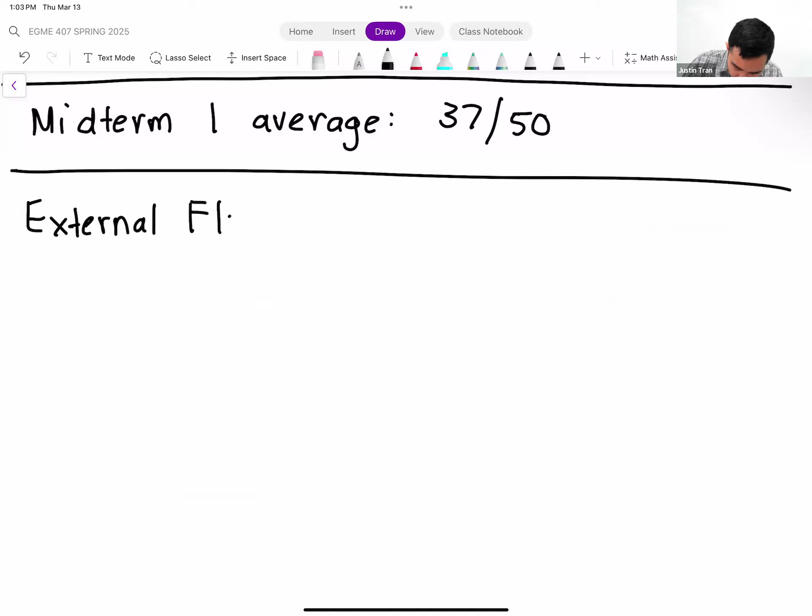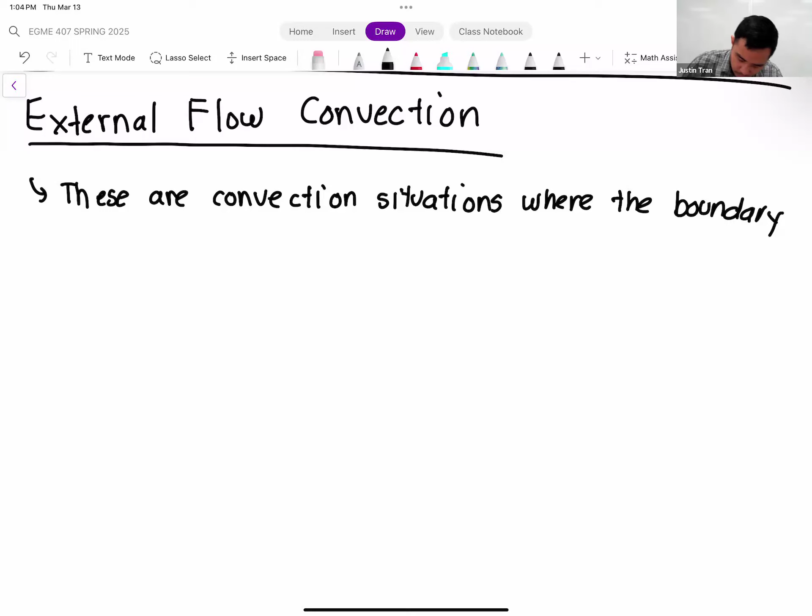External flow convection is a situation where we have convection heat transfer, meaning we have a fluid that's flowing through our system. But these are situations where the boundary layer is allowed to grow unimpeded. Whenever you have a fluid striking a solid or flowing past a solid, there's always going to be a boundary layer that forms. So for this case, we're looking at situations where the boundary layer keeps growing, with nothing stopping it from growing.

The classic example of this is flow over a flat plate. We have fluid flow coming towards the flat plate like this, and a boundary layer forms just like that. This fluid has a free stream velocity and a free stream temperature. In these situations, we're often interested in how much heat loss, or heat transfer, is coming from the plate leaving to the fluid.

So we're interested in the Q that's coming off of the surface, and of course we do have a way of computing this. The way we compute convection heat transfer traditionally is through Newton's law of cooling: H times A times the difference in temperature from the surface to the free stream.

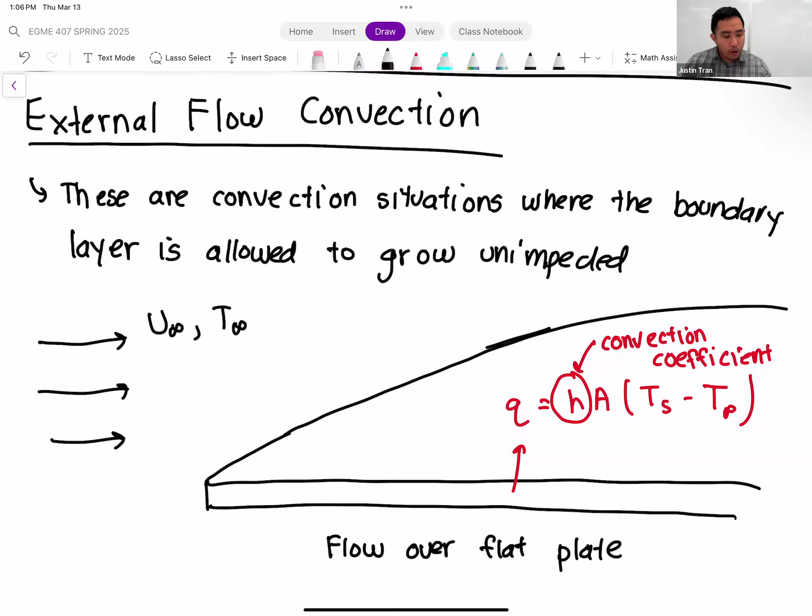We went over that methodology last time, and we did an example of that as well. But let me summarize it for you. Step one, we have to identify the flow geometry. Every single flow geometry is going to have a different correlation or formula that we use to solve for H. That's the first thing you have to do. Right now we only have one flow geometry, flow over a flat plate, but we're going to introduce more geometries as we go along.

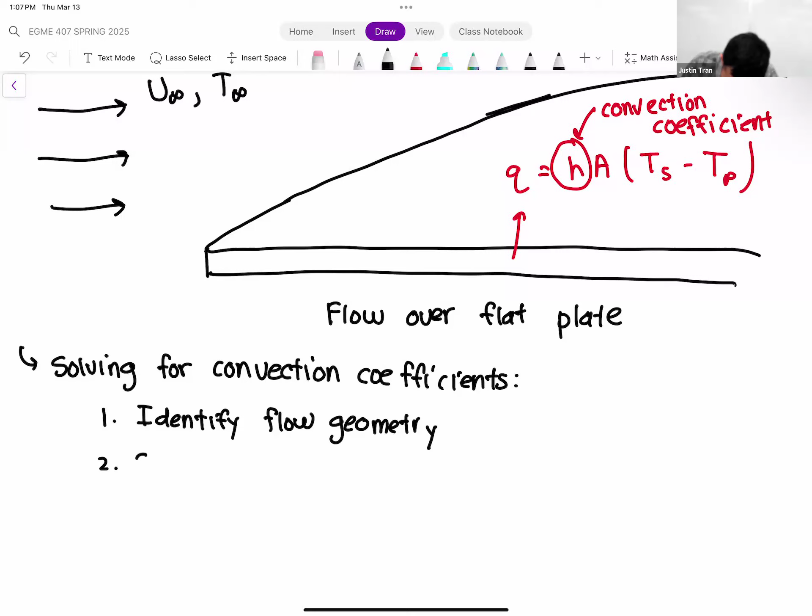Number two, we have to specify the film temperature for computing the fluid properties. A lot of the properties we use in our formulas are very temperature dependent. Things like the viscosity, the density, the Prandtl number all depend on the specific temperature of the fluid we are considering. So it's important for us to specify that film temperature so we can evaluate these fluid properties properly. The formula we typically use, the easiest one, is simply the average between the surface temperature and the free stream temperature. So TF is going to be TS, the surface temperature of the solid, plus T infinity, the free stream temperature, divided by 2.

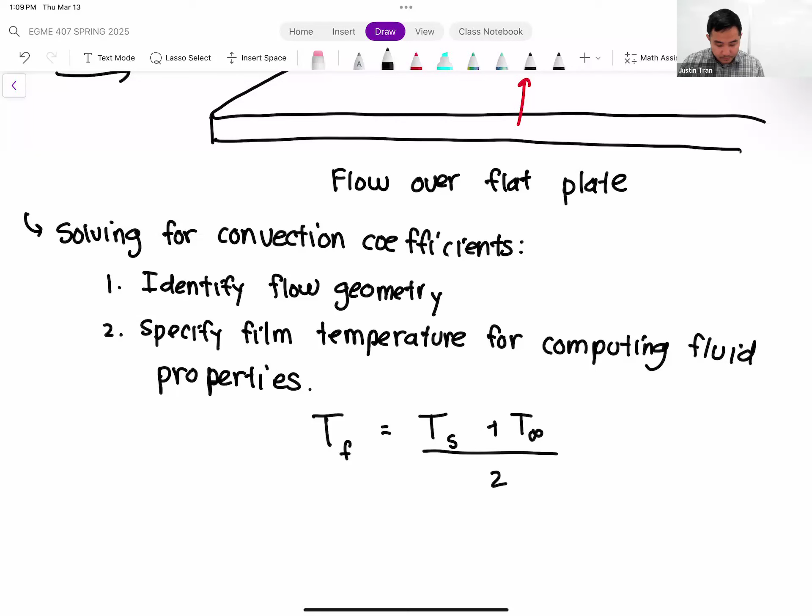Okay, and then based on that film temperature, you're going to look up the properties of the fluids in the corresponding tables or an online calculator in order to obtain their values.

Step 3. Once you have the fluid properties and you know the fluid velocity, you have everything you need to compute the Reynolds number.

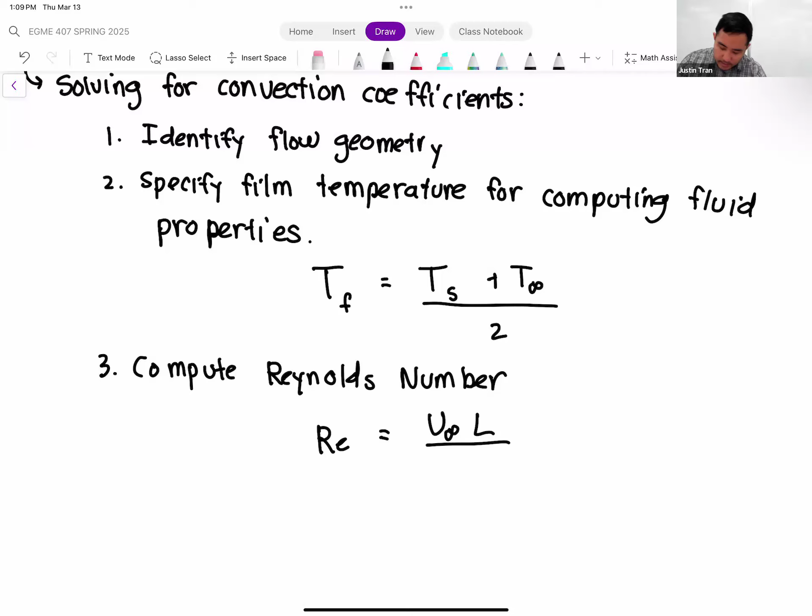So remember, the Reynolds number is equal to U infinity times some characteristic length. Usually that length is the length of the plate, at least for a flat plate, divided by the kinematic viscosity, which is what you looked up in step 2.

And then depending on the value of the Reynolds number, that's going to tell you whether your flow is going to be laminar or turbulent. For less than 5 times 10 to the 5th, this is laminar. But if we're greater than or equal to 5 times 10 to the 5th, we are turbulent. We haven't discussed turbulence just yet or how that's going to affect our Nusselt number correlations, but that's going to be the first thing that we do today.

Step 4 here is to select the appropriate Nusselt number correlation. This is kind of the key step because we're going to go over lots of different formulas for the Nusselt number. So you want to make sure you pick the right one.

Once you've selected the appropriate Nusselt correlation, step 5 is to finally compute the convection coefficient. We know no matter which Nusselt correlation you have, the Nusselt number is also equal to the convection coefficient multiplied by the length divided by the thermal conductivity of the fluid. So if you solve for H, it's just equal to the Nusselt number multiplied by KF divided by L.

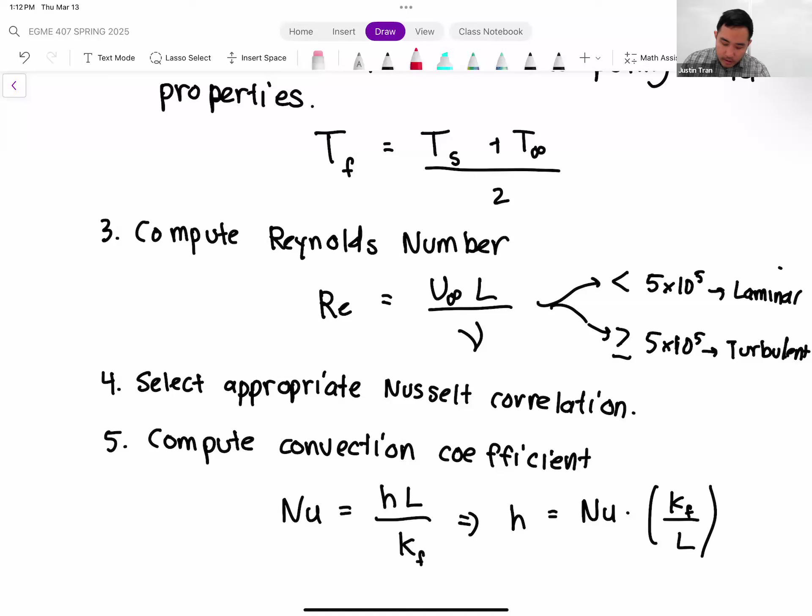So this kind of 5-step process, you're going to follow this, at least for the foreseeable future, for computing the convection coefficient. And of course, the key step here is going to be step 4.

I think part of the reason convection is confusing for people is that we're going to have so many different formulas that say NU is equal to something. So it's very easy to get confused between all the different formulas for the Nusselt number that we're going to go over. But you have to remember that each of these formulas has specific conditions on which you should actually use them.

So far, we've only gone over one, right? The only Nusselt number correlation we've gone over so far is 0.664 times the Reynolds number raised to the 1/2 power times Prandtl number to the 1/3 power. This is specifically only for cases when you have flow over a flat plate, and the flow is laminar.

So today, we're going to introduce a couple more Nusselt number correlations, just to be aware of the formulas themselves, of course that's what you plug into, but you want to be aware of the conditions under which you can actually use that correlation. I think that's kind of the main confusion with convection, that we're going to go over lots of these different Nusselt correlations. You want to make sure you pick the right one.

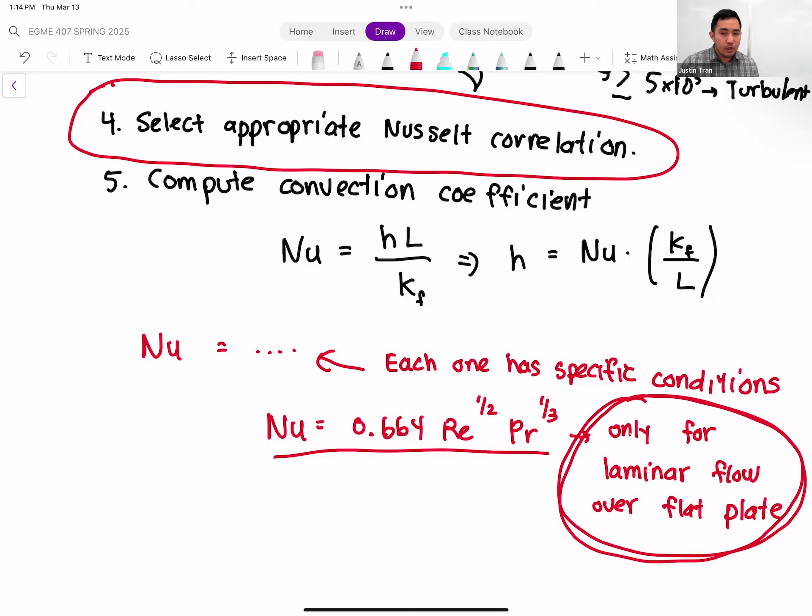So that was just kind of a summary of what we talked about on Tuesday. Any questions on this so far?

Okay, all right, so let's go over one of those other conditions. Let's look specifically, let's stay with the flat plate. So let's look at the flat plate under different conditions.

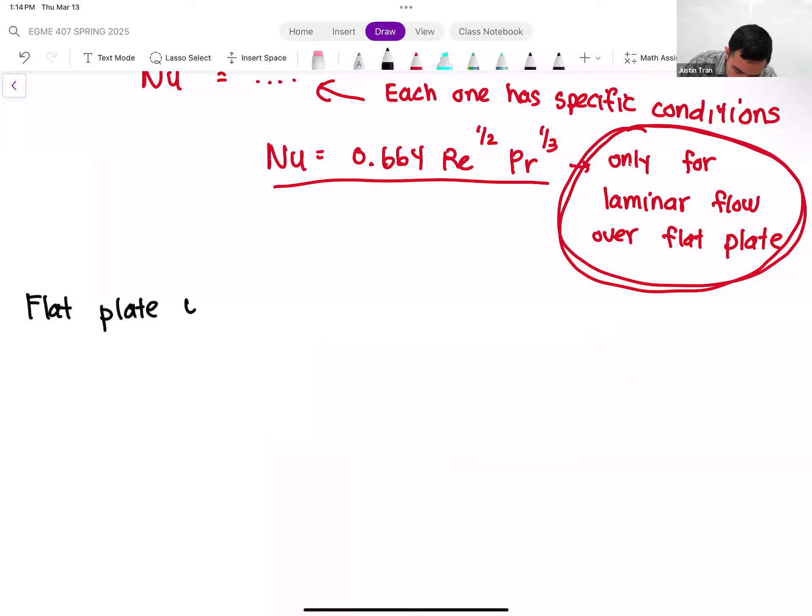If you change the flow conditions, even some of the thermal conditions too on the flat plate, it can affect how your Nusselt number is computed. So let's start with turbulent flow.

So if you remember from last week, remember we discussed how turbulent flow is often used, or the way that it affects heat transfer is that it often enhances heat transfer compared to laminar flow.

Right, and so that's going to be reflected in our Nusselt number correlation as well. So let's go ahead and state it: the Nusselt number correlation for turbulent flow over a flat plate. Our flow geometry is the same, it's just that our flow conditions are different.

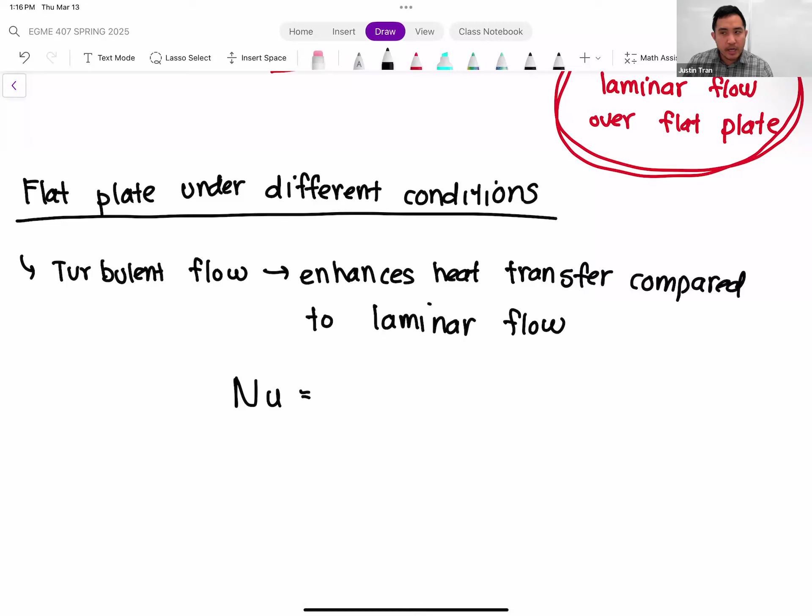The correlation is 0.037 times Reynolds number raised to the 4/5 power times Prandtl number raised to the 1/3 power. Actually, I should append this: this is for a fully turbulent flow over a flat plate. We'll go over what that means in a second.

So if you compare this formula for the Nusselt number correlation to our laminar case, which conveniently is right there, if you look at the coefficient in front, it may look like the second correlation is actually less. If you compare the 0.664 and the 0.037, just based on that, it looks like your Nusselt number for laminar flow is going to be 20 times higher than that for turbulent flow. But if you actually look at the exponents, the main difference between these correlations is that for turbulent flow the Reynolds number is raised to the 4/5 power, as opposed to laminar flow, where the Reynolds number is only raised to the 1/2 power.

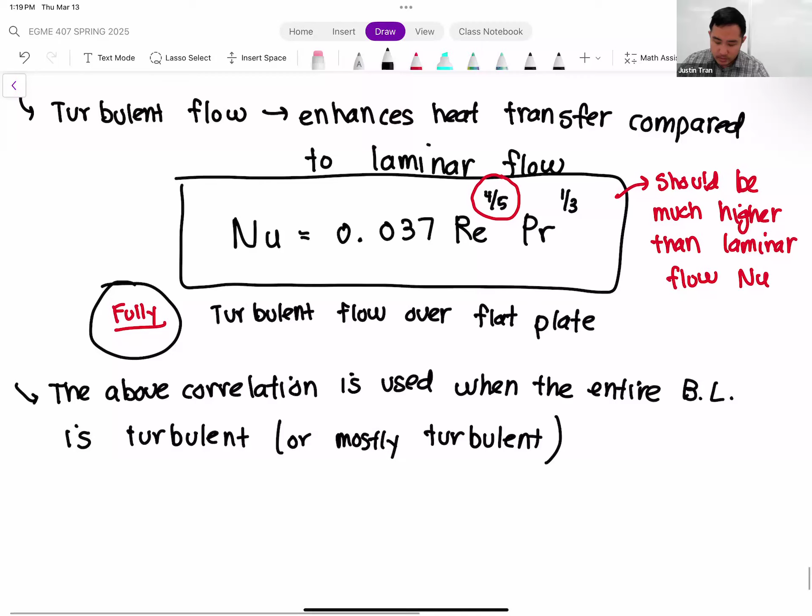For undisturbed flow, where you don't have anything there — we're going to talk later about how sometimes you may want to trip turbulence on purpose, adding a turbulence trip wire or a rough surface to induce turbulent flow. But if you have a perfectly smooth surface with undisturbed flow, the boundary layer actually starts out laminar and then transitions into turbulence.

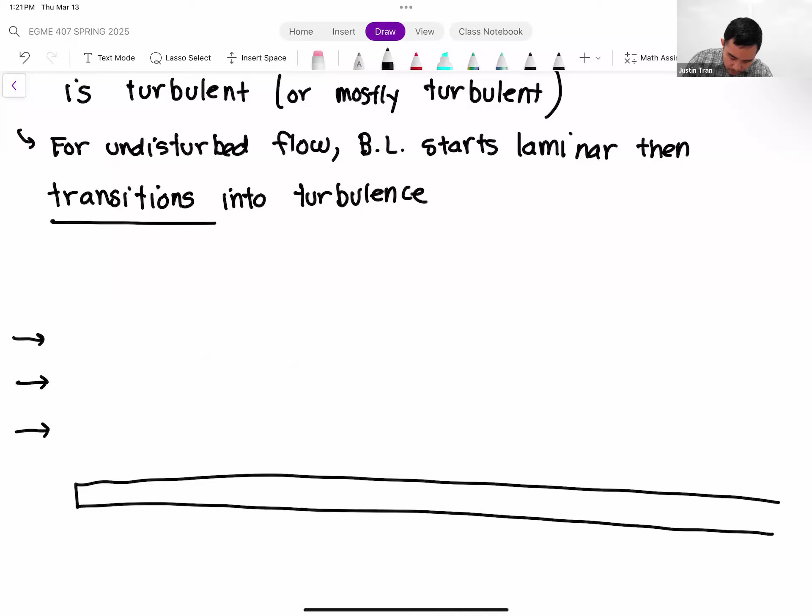It looks something like this: if we draw a flat plate, we have flow coming at the boundary layer like this, and we're going to assume this flow is undisturbed, so there's nothing impeding the flow or inducing turbulence. At first the boundary layer is going to be laminar, and this always happens unless you trip it. So the front region of the boundary layer is always going to be laminar, and then at some point the flow transitions into turbulence.

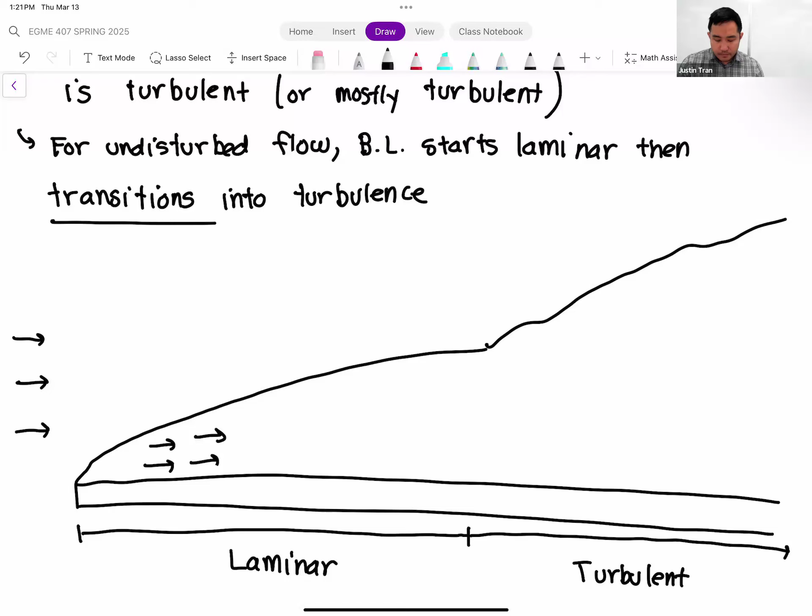Once we get to this point, the flow gets more chaotic. This type of boundary layer, where you have a laminar region and a turbulent region that are roughly about the same, we call a mixed boundary layer.

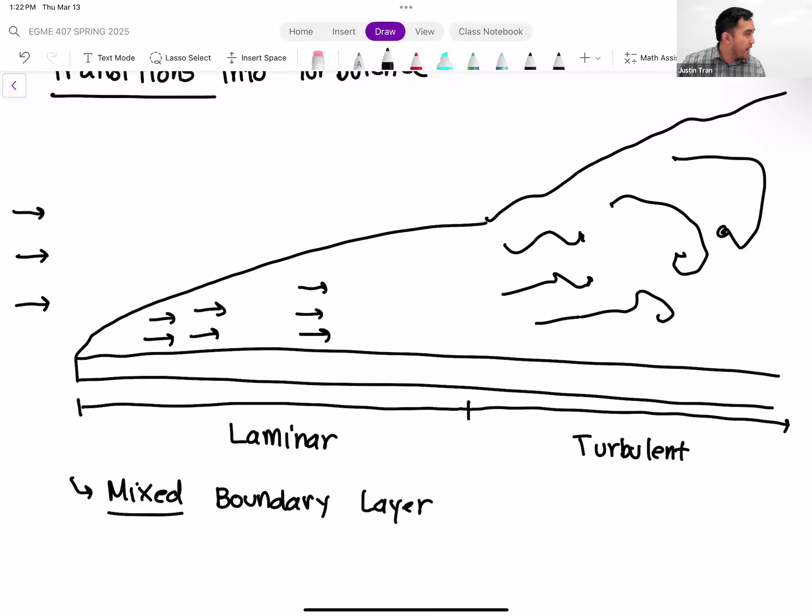A mixed boundary layer has another Nusselt number correlation. This correlation accounts for the fact that we have a laminar region and a turbulent region, and the heat transfer characteristics are going to be different in each. This correlation looks like the following — it's a little bit more involved.

It's going to be parentheses, 0.037 times Reynolds number to the 4/5 power — that's the contribution from the turbulent portion.

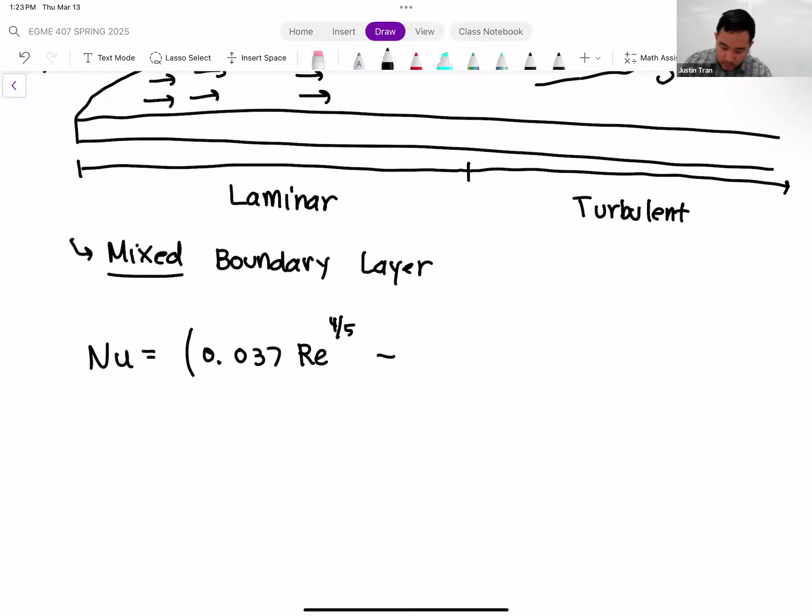But we have to adjust this — we have to subtract out the fact that this boundary layer starts out laminar. Luckily, or maybe unluckily, this number is a fixed number: 871.323, a very random number. Then you multiply this by Prandtl number to the 1/3.

So if you look at this formula compared to the fully turbulent boundary layer, you can see the only difference is that we're subtracting this term. All this term does is adjust based on the laminar region of that boundary layer.

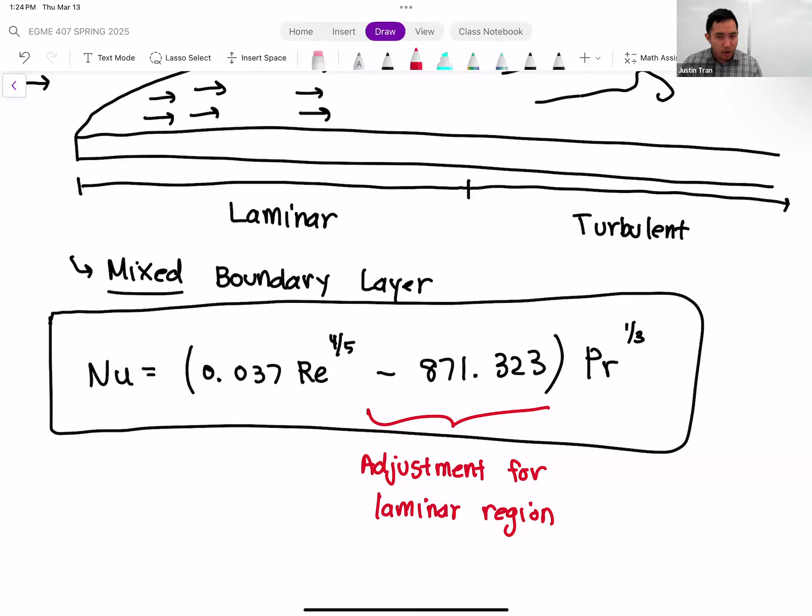Technically speaking, unless the problem tells you that you have a rough surface purposely tripping turbulence, this formula here is the more correct one to use. This number can be hard to remember—honestly, I always forget it, that's why I have it written down. A lot of times your boundary layer is 99% turbulent anyway, so it probably won't matter which one you use, but if you want to be technically correct, this one is more precise, especially in boundary layers that are transitional, close to that threshold.

Questions? When we have a fully turbulent flow, would that be told to us, or will we have to determine that with the Reynolds number?

Yeah, there are usually two different cases for this. There are cases where your Reynolds number may be exceptionally high, like something on the order of 10 to the 7th power. In that case, you can assume the boundary is fully turbulent because the Reynolds number is so high. There might be other cases where the problem tells you the geometry added a tripwire or some kind of rough surface to purposely trip turbulence—in that case, you can also assume you have a fully turbulent boundary layer.

So, since a flow can't just all of a sudden go from laminar to turbulent—say, for example, if we were to get a Reynolds number computed to be 5 times 10 to the 5th, can we assume that's a mixed boundary layer?

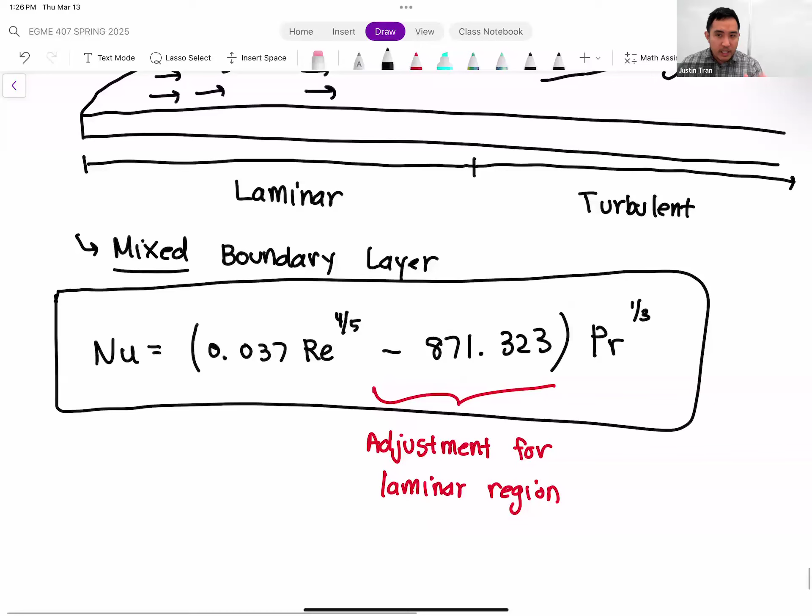Another interesting thing—I think the homework actually asked this too—is you can actually locate approximately where in the boundary layer the flow transitions to turbulence. This can be useful for determining exactly how much of your boundary layer is turbulent or not.

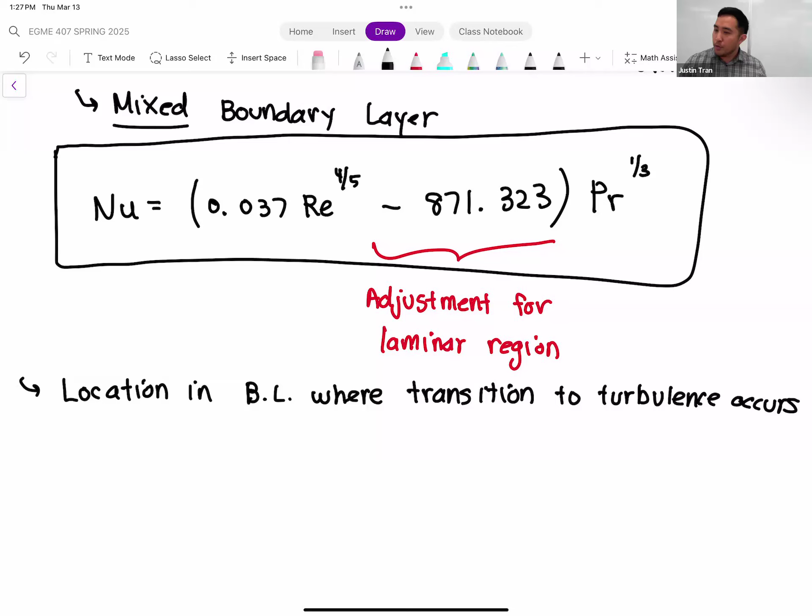We know that the flow transitions to turbulence when the Reynolds number reaches 5 times 10 to the 5th, right? That's kind of the magic number for external flow. So if you have flow over a flat plate, you can set this equal to the Reynolds number itself: U infinity divided by the viscosity.

But instead of plugging in the total length of your plate, you can instead solve for some location X. If you set the Reynolds number exactly equal to 5 times 10 to the 5th, you can compute the exact location X where that transition occurs.

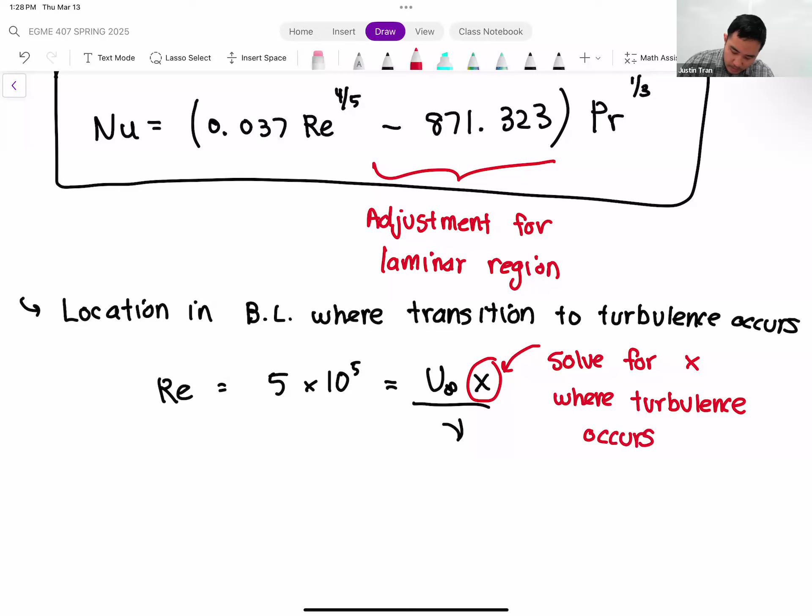So if we just rearrange this, we have X is equal to 5 times 10 to the 5th multiplied by viscosity, divided by U infinity. Sometimes we call this X sub C—that's the critical length where turbulence occurs.

Sometimes it's very obvious where your Reynolds number is extremely high, but if you're not sure how much of your boundary layer is turbulent, you can take the ratio of this critical X sub C divided by L. The C stands for critical.

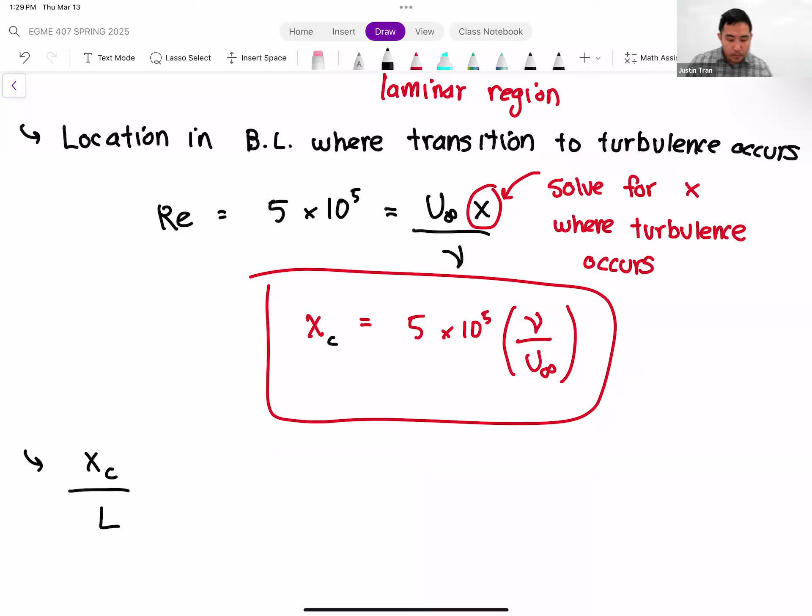So if you take the ratio between the critical length and the total length of your plate, this will show you the percentage of your surface that has a laminar boundary layer.

If this percentage is anywhere between 1 to 5%, I would just assume that the whole thing is turbulent. There's no actual number for that, but that's just kind of my own approximation. If you can always remember the number 871.323, then you can just use that formula there. But I have a hard time remembering this number, so a lot of times I just assume that the boundary layer is completely turbulent.

Any questions on this?

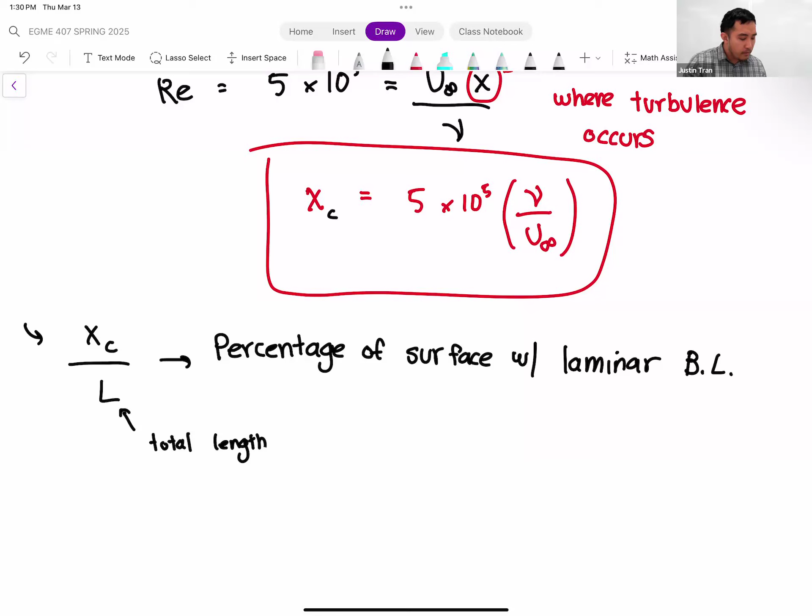Alright, so there's one more Nusselt correlation that I want to go over before we do our next example. This one is a little bit more niche, and honestly I don't use it all too much. But for cases where the thermal condition at the plate is different, that does actually change your Nusselt number correlation as well.

Because technically, the thermal condition at the plate is going to affect your thermal boundary layer production, and so that's going to affect things. So what do I mean by the thermal condition? So far, we've essentially assumed that the plate is at a uniform temperature, so the entire plate is the same temperature throughout. In other words, there's just one surface temperature on the plate, and that surface temperature goes throughout the entire plate. But there's a lot of situations where that's not true, right?

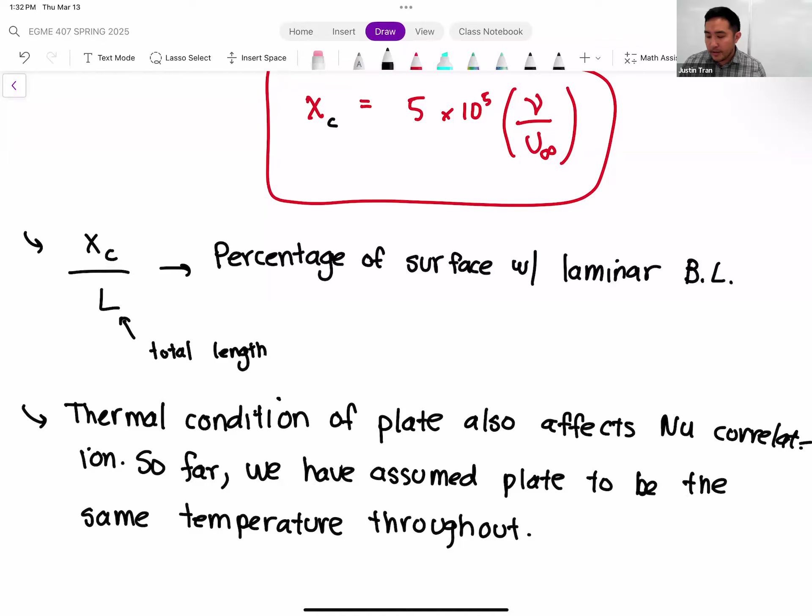If you think about our fins, one of the hallmarks of fins and extended surfaces is that you have a much higher temperature near the base of the fin and a much lower temperature at the end. So that assumption of the plate being all the same temperature is probably not going to be appropriate in that case. We can adjust our Nusselt number correlation for cases when our plate may not have a uniform temperature, but maybe has a uniform heat flux throughout the entire plate.

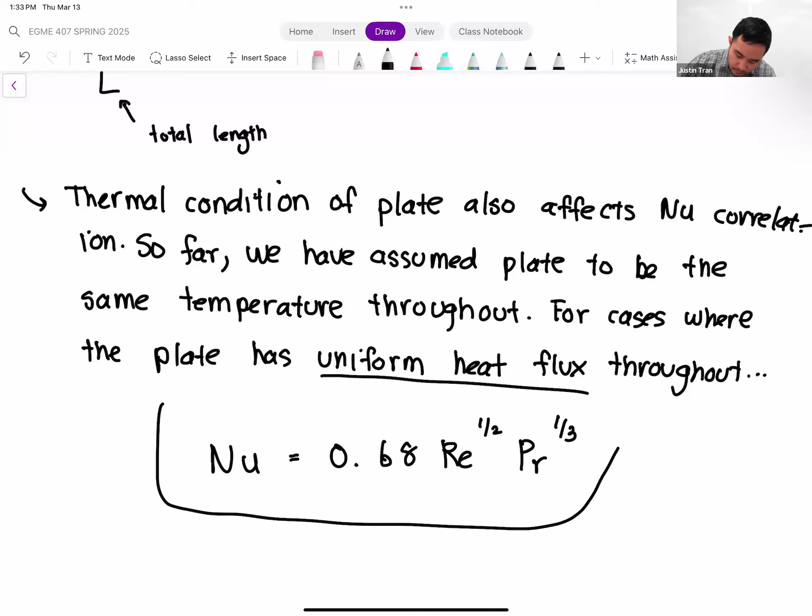This Nusselt correlation would be more appropriate for something like a fin, where we know the temperature is going to change throughout the length of the fin, but it's probably more appropriate to say that the heat flux is going to be more uniform throughout. Then our Nusselt number correlation is 0.68 times the Reynolds number to the 1/2 power times Prandtl number to the 1/3. This is specifically for laminar flow.

Question, yes. How do we know when it's like, besides just telling us it's more heat flux, is that the only thing that helps?

Yeah, so honestly, for most practical situations, it's going to be neither a uniform temperature or a uniform heat flux. It's going to be somewhere in between. It's very hard to get a physical situation to obey that exact thing, but usually it's going to be closer to one or the other. For most of my cases, I would lean more towards the side of uniform temperature, that's going to be the more common case. It's only really if you have a really long surface where you have a huge temperature difference from one end to the other, then that's where this one would be more appropriate. But generally for this class, I will tell you in the problem which one to use.

Yeah. And actually, these formulas aren't all that different. If you compare this one to our other one from above, the one we used yesterday, the only difference is in the coefficient out in front. Instead of 0.664, we have 0.68, which is practically the same. So if you're going to remember one formula, I would remember the other one. But technically there are differences, and for other geometries, there's going to be bigger differences based on the thermal conditions. We're not going to go through a lot of those in this class, but I just wanted to show you that it can change.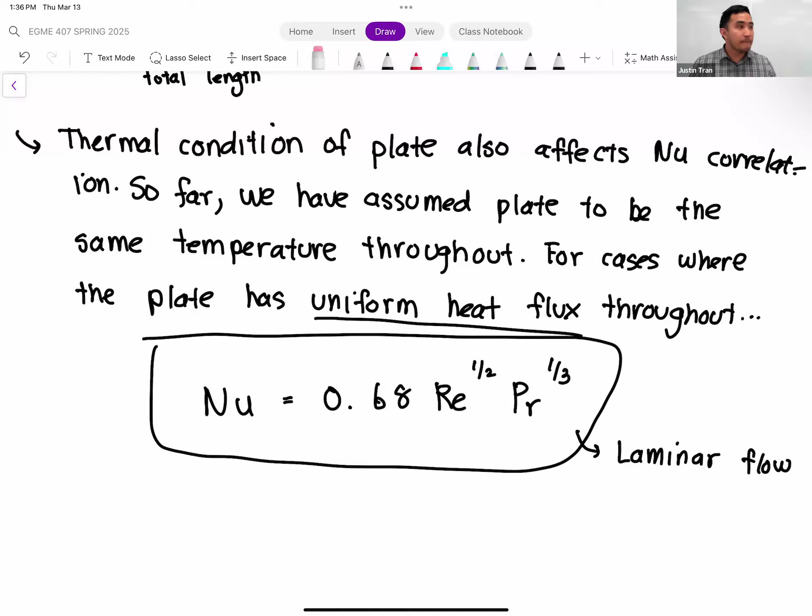Any questions on this before we jump into an example? Okay, alright, so let's do an example.

Okay, so actually let's consider a fin. And this fin, we'll say, is responsible for cooling a computer.

Okay, if you've ever looked inside a computer, all these computers have some kind of fan that's meant to circulate air or blow air. We're going to be looking at forced convection from a fan to cool a computer.

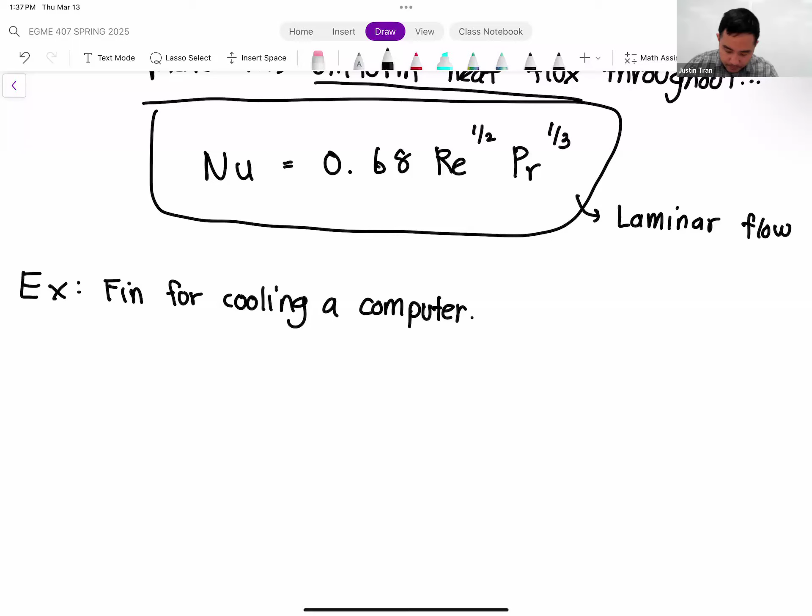So let's say our computer surface is a flat plate, because that's all we know how to do so far. Let's say we have a fan over here, and our fan is rotating and blowing air across the surface of our computer.

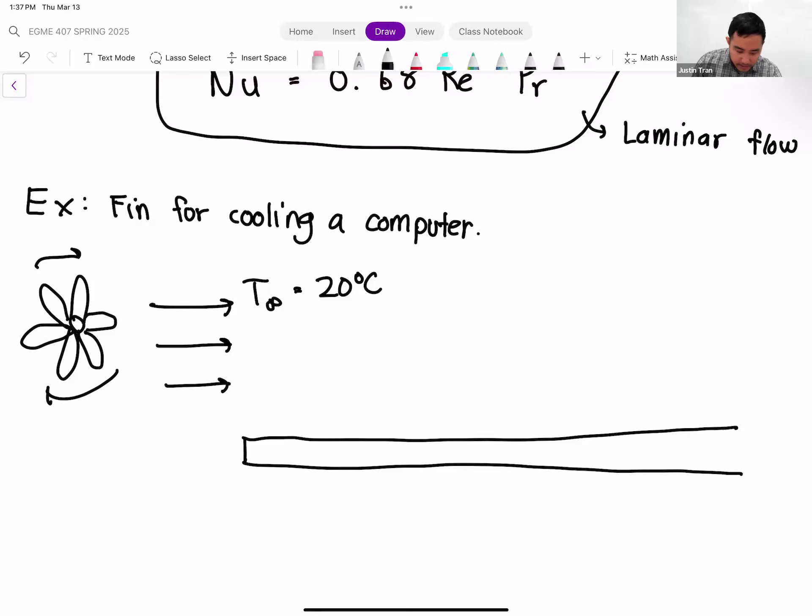Let's say that this air is slightly cooler than room temperature, so we'll say the air has a temperature of 20 degrees C. We'll say the length of this plate is only 10 centimeters.

So even though it's a fin, it's a fairly small fin. And what we're actually going to assume is that this fin is at the same temperature all throughout. And just for purposes of calculations so we can compute the surface area, we'll say that this fin has a width into the page of 5 centimeters.

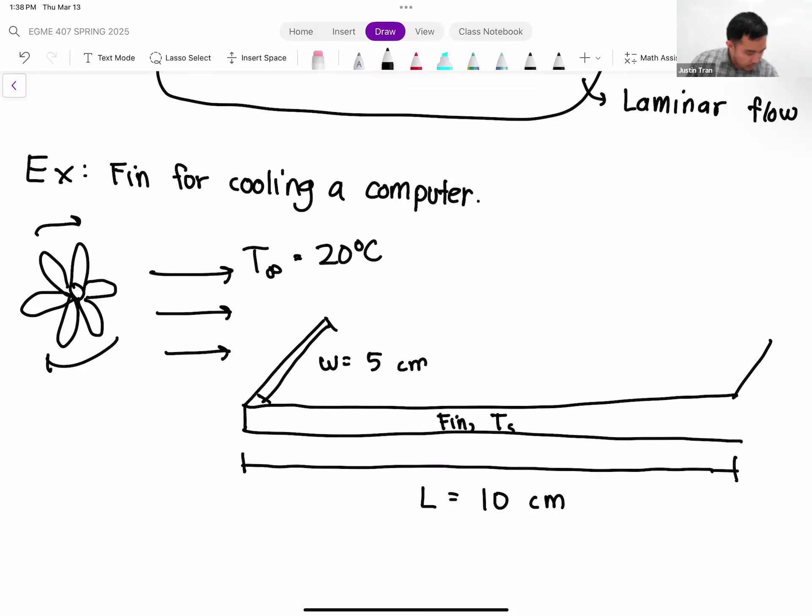So the surface temperature in this case, we're going to say is 45 degrees C. So we want to maintain a surface temperature of 45 degrees C on this computer, okay?

And we're going to assume that the amount of heat that the computer is giving off is equal to 5 watts. So that's how much power we have to offload into the environment. We want to find out...

So basically, in this situation, we're actually designing our fan. We've kind of already built our system, designed it to run the top shelf games on ultra high graphics. And so we want to make sure that our fan is producing adequate airflow to cool our computer.

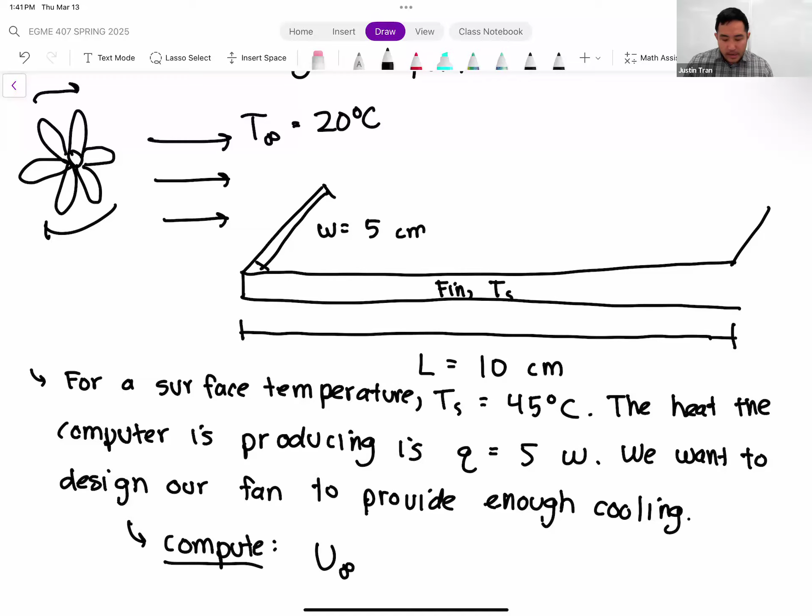All right, so let's start this problem using our convection problem solving methodology. Let's get as far as we can, because we don't have the velocity, so we actually can't compute the Reynolds number, but we can get quite far.

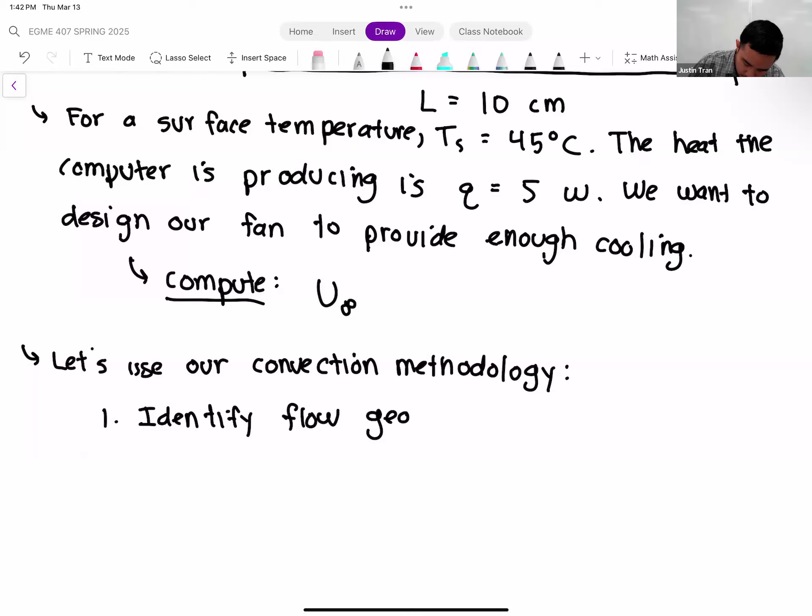So step one is to identify the flow geometry. This is pretty straightforward in this case—we have flow over a flat plate. Easy peasy. Which is good because that's the only geometry we know so far.

All right, so step two in our methodology is we need to compute the film temperature—basically the temperature at which we're going to evaluate the fluid properties. We can do that in this case because we have a surface temperature and a temperature of the free stream, so let's go ahead and compute TF.

TF here is going to be the sum of T infinity plus TS divided by 2. We know T infinity in this case is 20 degrees C, and our surface temperature here is 45 degrees C, so we divide that by 2. We get 32.5 degrees C.

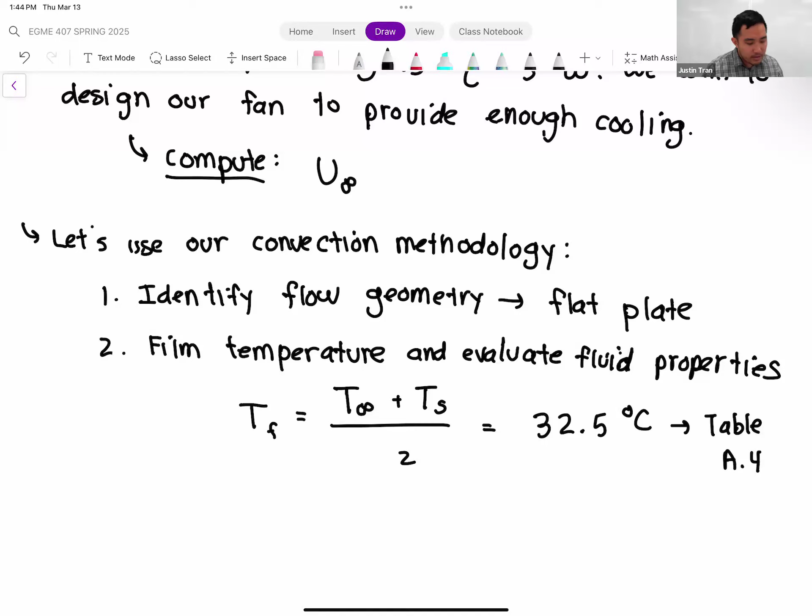All right, and if you use this temperature, you refer to the table in the book—this is either table A4, the properties of air at specific temperatures. Or if you want to use a calculator, that's fine too. There are online calculators—if we have time after class, I'll show you what that looks like.

And if we evaluate it at that temperature, we would get a kinematic viscosity of 15.89 times 10 to the minus 6 meters squared per second. We have a thermal conductivity of the fluid equal to 26.3 times 10 to the minus 3 watts per meter Kelvin. And our Prandtl number in this case is 0.707. So those properties are going to be important for us moving forward.

The next step in our convection methodology here is to compute the Reynolds number to determine whether we have turbulent or laminar flow.

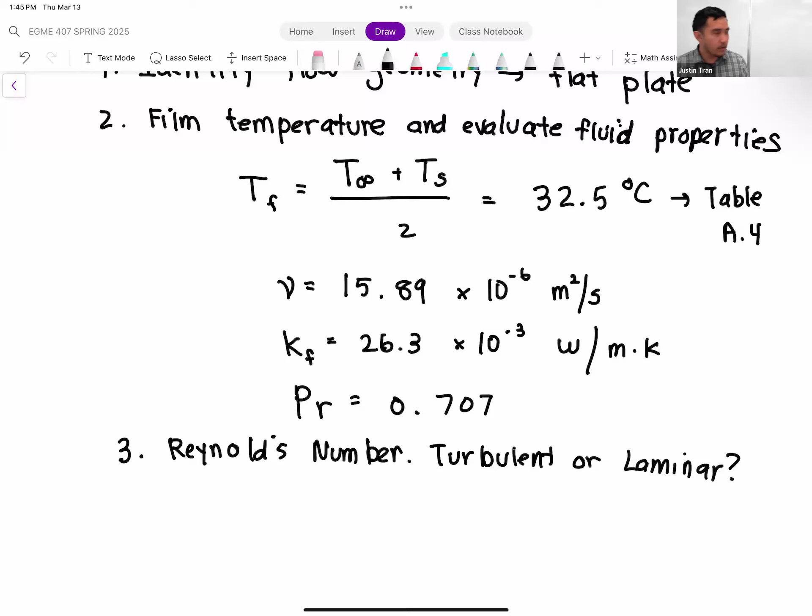Okay, so the Reynolds number formula is U infinity multiplied by the length of the plate, divided by the kinematic viscosity.

Unfortunately, we can't compute this just yet because we don't know the fluid velocity. In fact, that's what we're solving for. So we'll have to leave this as it is right now. But before we move forward, since in step 4 we need to compute the Nusselt number, we do need to make an assumption on this.

Because that's going to affect the Nusselt number correlation that we select, which is also going to affect the convection coefficient that we compute.

Now, in situations like this, if you know a bit about your system, the length scales, the typical velocities, you can make a more informed assumption here. If you don't, you're kind of just shooting in the dark a little bit. You have to pick one. But what you can do is solve the problem, then go back and check later whether your assumption was correct. So we may need to go back and check if our assumption is correct.

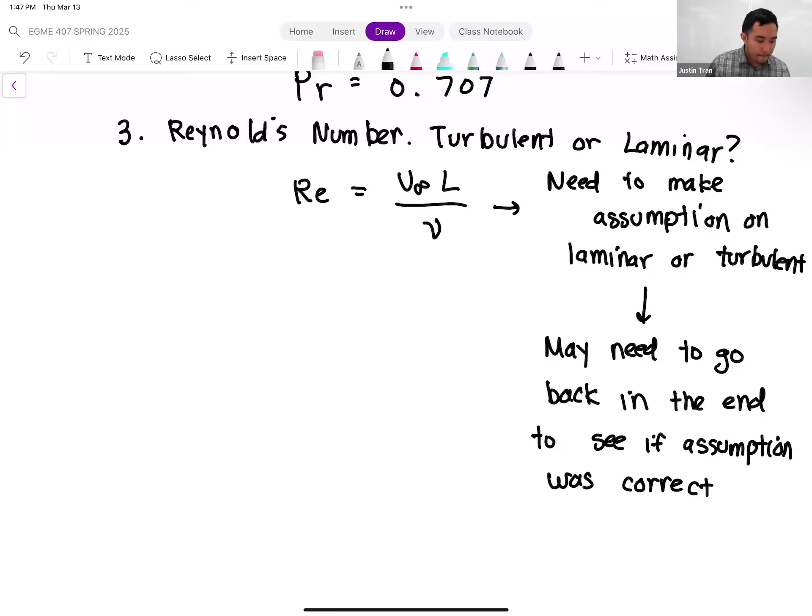So we'll leave a note for that here now, and go back and check it later. For now, let's assume laminar flow.

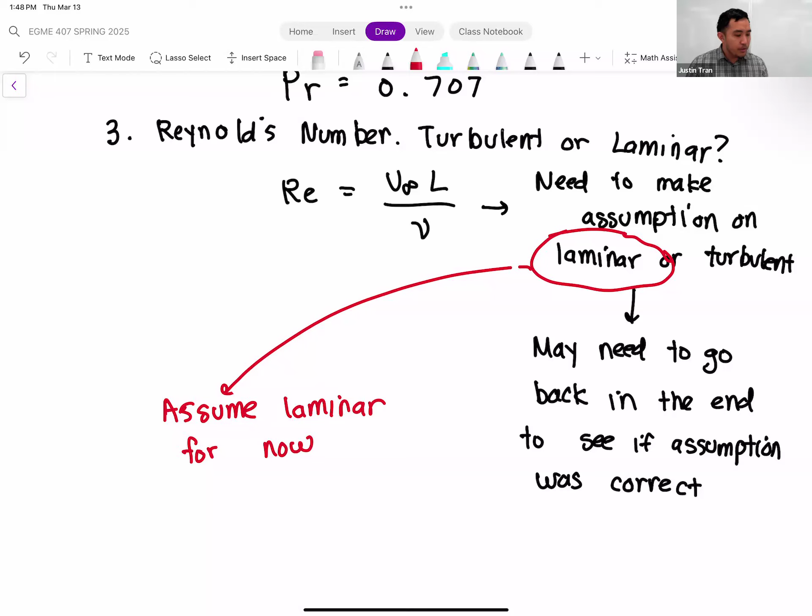The reason I would pick laminar flow in this case is because the length scales are quite small. We're talking about flow over just a very small computer, so our length scale is only 10 centimeters. We're not putting a jet engine inside our computer - this is a little dinky plastic fan. So I don't expect the velocities to be all that high, and I think our assumption of laminar flow is pretty justified in this case, but we'll go back and check later on.

Step 4 is to select the appropriate Nusselt correlation. For laminar flow over a flat plate with constant surface temperature, we have our Nusselt correlation: 0.664 times Reynolds number to the 1/2, times Prandtl number to the 1/3.

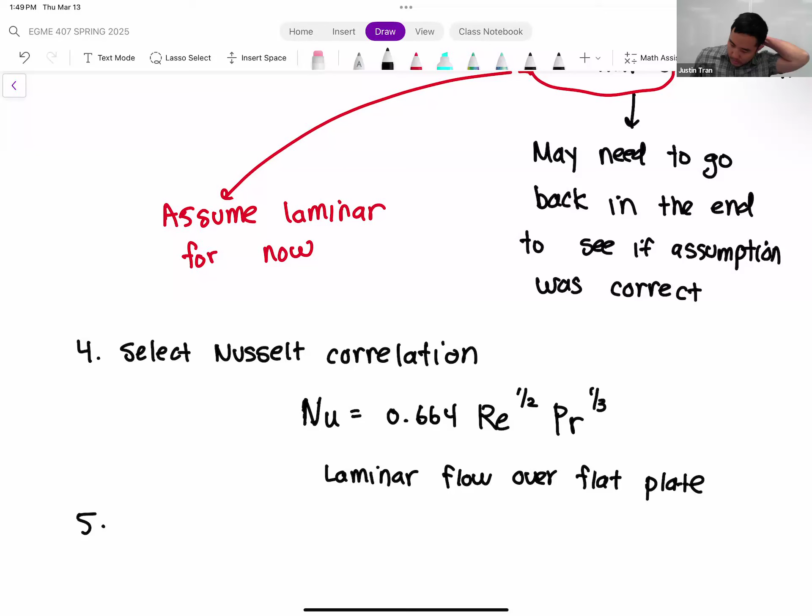All right, now that we've selected our appropriate Nusselt correlation, step 5 is to compute the convection coefficient.

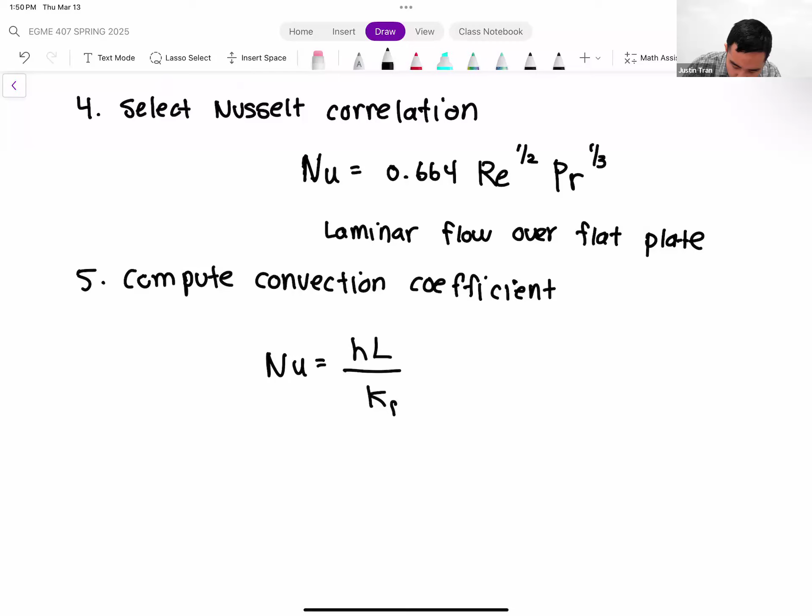We know the Nusselt number is equal to H times L divided by KF. So if we set that equal to the correlation we have above: 0.664, Reynolds number to the 1/2 times Prandtl number to the 1/3.

Let's solve this equation for H. If we solve this equation for H, we get H is equal to KF divided by L, times 0.664, Reynolds number to the 1/2 times Prandtl number to the 1/3. Now we have everything in this expression except for the Reynolds number, because we don't know the velocity.

What you're going to see is we're actually going to kind of back-compute it. But at least at this point, we have an expression for the convection coefficient that we can use in our other equations.

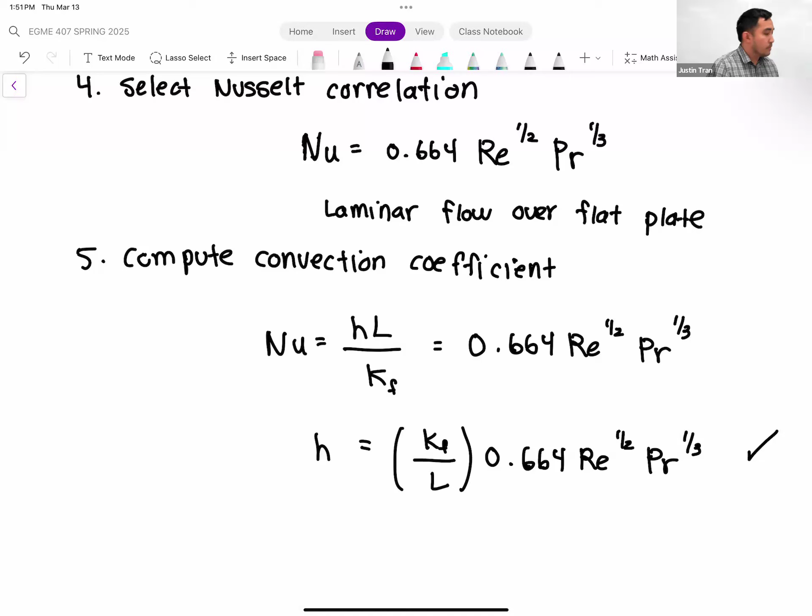All right, any questions on how we got to this point in the example here? Okay, good.

So for a typical problem, this is where we'd be able to plug in and solve for H. But since we don't know the Reynolds number for this example, we're going to operate under this assumption right here. Okay, so let's go back to the problem.

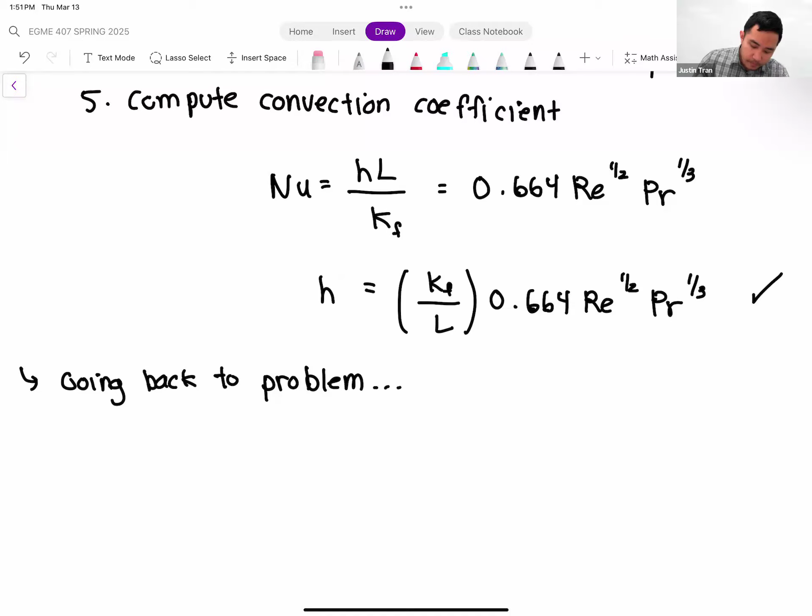Let me scroll up here so you can see. We have a situation with airflow going over a computer. In this problem, we know exactly what the surface temperature of the computer is - 45 degrees C. We know the free stream temperature of the fluid is 20 degrees C. And in this case, quite uniquely, we actually know how much heat the computer is giving off. So we know Q, we know TS, and we know T infinity.

We can actually relate all these things - a formula that relates all three of these quantities is Newton's law of cooling. We know that Q for convection is equal to H times A times TS minus T infinity.

So let's bring that relationship down to the bottom, and let's use that to solve eventually for the fluid velocity. Because what do we have? We have an expression for H, right? We know that H is going to be a function of the Reynolds number, which is a function of the velocity. So we can eventually plug everything back in and solve for the velocity from this expression right here.

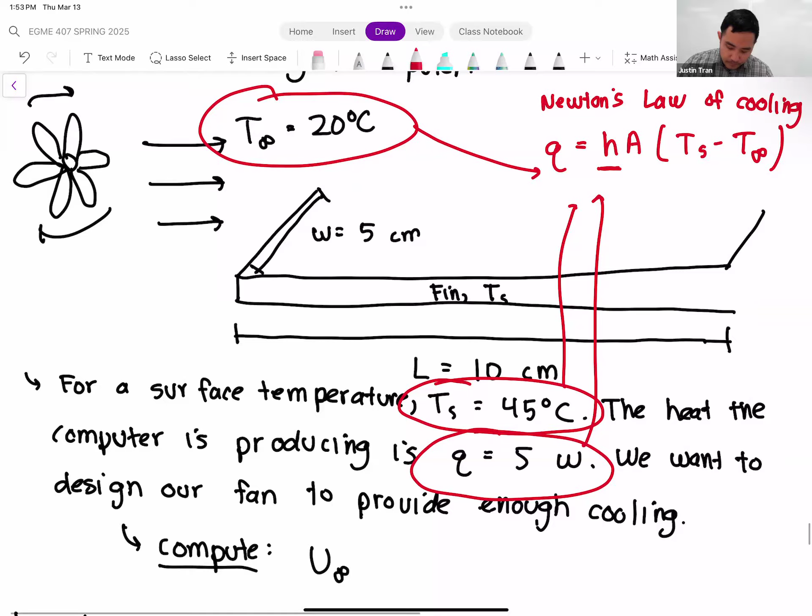Okay, so if we have Q equal to H times A times Ts minus T infinity, let's take this expression for H that we found before and plug that in here. I'm going to plug in for A as well, since we have a rectangular plate, so A is nothing more than the length times the width.

So we have Q is equal to, we plug in for H, we have Kf over L times 0.664 Reynolds number to the 1/2 times Prandtl number to the 1/3. Let me put square brackets around this to make it a bit neater. The area is the length times the width, and that's going to be multiplied by the temperature difference, Ts minus T infinity.

So it's a little bit of a mess, especially with the decimal there. But let's take this expression and solve for the only unknown here, which is the Reynolds number.

All right, so if we solve for that, let's see. We're going to be dividing by a lot of stuff here. So we have Q divided by Kf over L times 0.664 times Prandtl number to the 1/3, times L times W times Ts minus T infinity. All that's equal to Reynolds number to the 1/2.

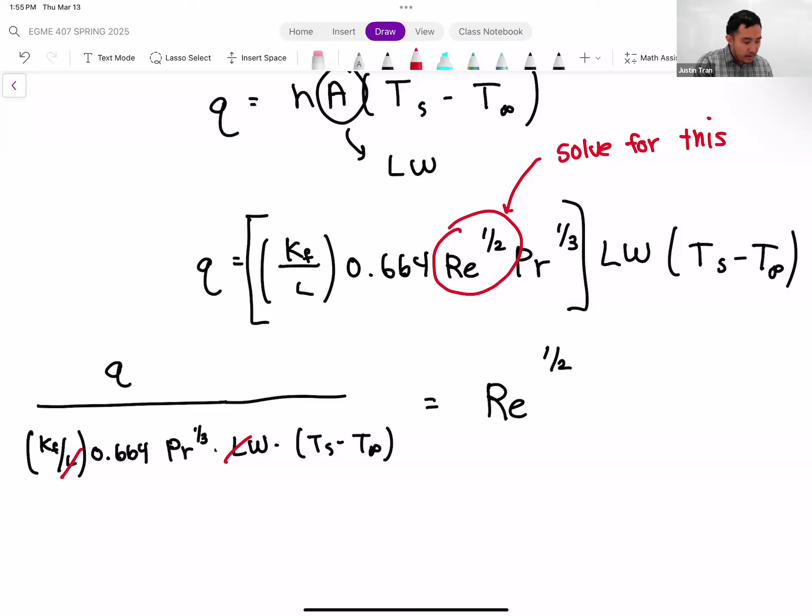Okay, so everything on the left-hand side that we can actually plug in, we know kind of what that is. So if we plug in everything there and we square it...

So everything on the left-hand side was either given to us in the problem or it's a fluid property that we looked up in the table. And so in that case, we can compute the Reynolds number, and in this case it's 6.61 times 10 to the 4th power.

Which, if you remember, in order to get to this point, we had to assume that our flow was laminar. So let's confirm that our flow is indeed laminar. Since this Reynolds number we computed is less than 5 times 10 to the 5th, this confirms our assumption that our flow is indeed laminar.

That's good, so that means we can continue. But let's say you solved this problem and assumed initially that the flow was turbulent, but then found the flow is laminar - then you would just redo the problem and change that assumption from the beginning. Sometimes with these convection problems, just because of the way the correlations are designed, you're going to have to do a little bit of guess and check. That's okay, just make sure you're aware of that.

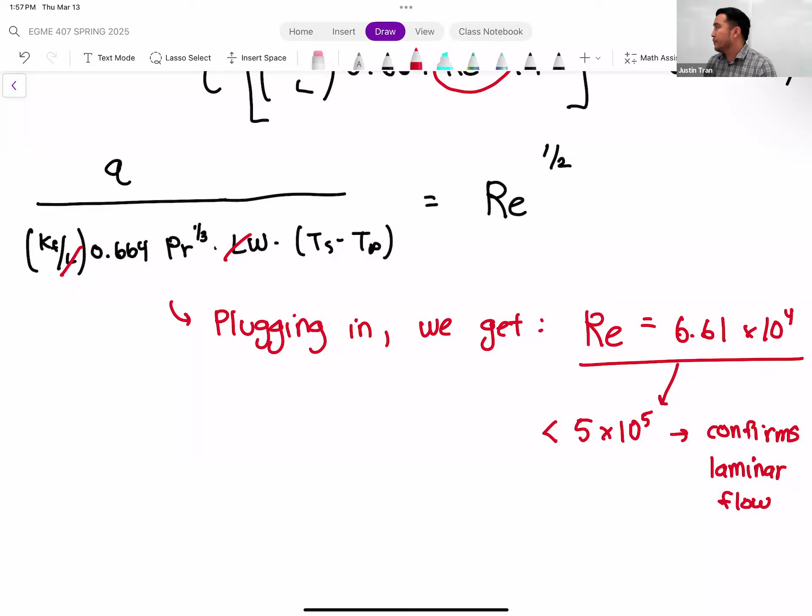And now that we have the Reynolds number, we can use it to solve for the velocity. So the Reynolds number we know is equal to U infinity times the length of the plate divided by the kinematic viscosity. So if we solve for the velocity here, U infinity is equal to Reynolds number times the kinematic viscosity divided by L.

We plug everything in - we know the viscosity from the fluid properties that we looked up in step 2, we know the length of the plate, we just solved for the Reynolds number, and so the fluid velocity in this case is 10.5 meters per second.

Which is not insignificant, that's actually a pretty decent speed. So in order to keep your computer cool, sounds like you need a pretty powerful fan in order to get that to work.

I know there was a lot involved with that example, but it's a good example of some creative things you can do with these convection type of problems. And this is really practical too, directly applied to thermal design of a system. Based on the speed, you'll know exactly which fan to order for your rig.

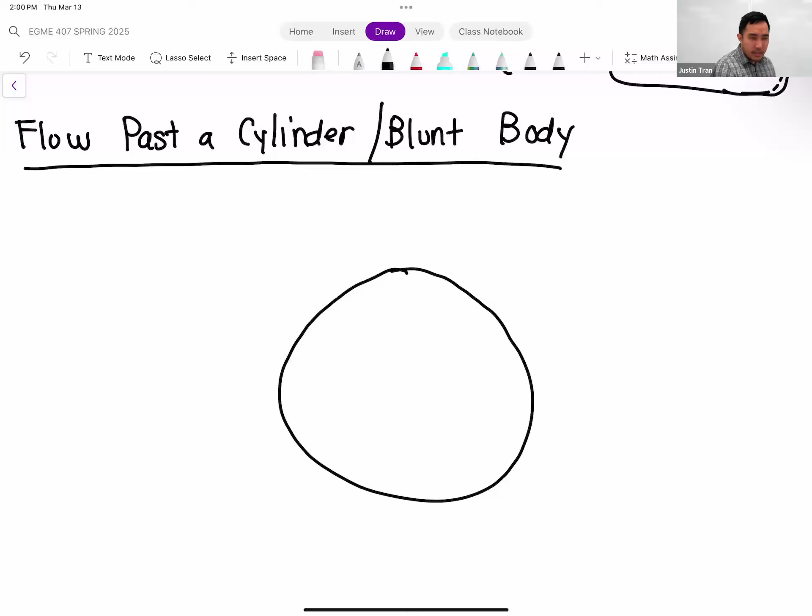I'm going to use a cylinder, although these correlations we're going to go over work for almost any blunt body, but a cylinder is just easiest to draw. So we'll say the cylinder has a diameter D. We have flow coming at it, and of course this flow has a velocity U infinity.

The flow past the cylinder is actually quite interesting, because the flow has to go around the cylinder, right? You can't just phase through it, it has to go around the solid object. So there's always going to be a portion of your boundary layer where we say the boundary layer is attached to your solid.

Usually on the upstream side of your geometry, you're going to have that boundary layer be attached. But eventually, because of the nature of this geometry, there's going to be a portion where the boundary layer actually separates from the object, a point where it comes off the body itself.

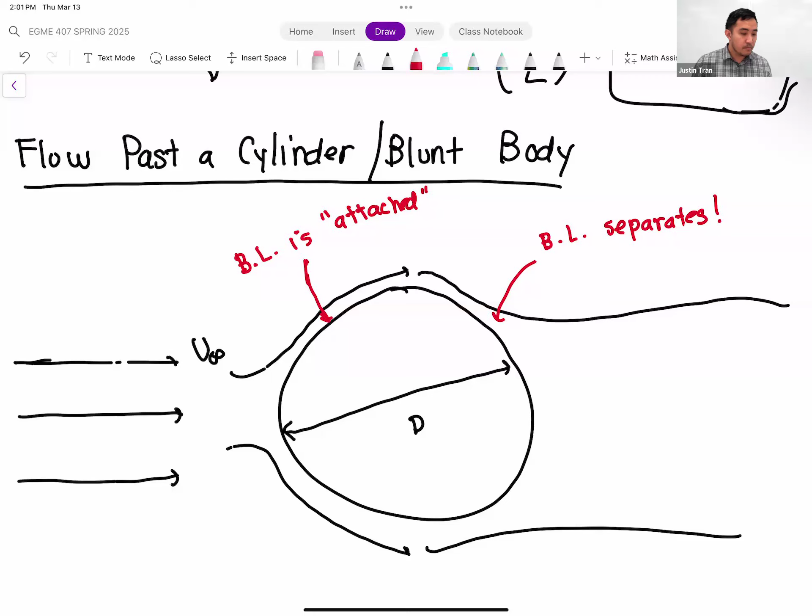And that creates a region on the back end of your body that we call the wake region. What's unique about the wake region is that it presents very unique fluid mechanics. The flow patterns, velocities, and pressures in the wake region are very different compared to the boundary layer.

And so if it's going to affect the flow patterns, it's also going to affect your convection heat transfer as well. So we have three different types of flow conditions on the surface that we need to account for in a blunt body.

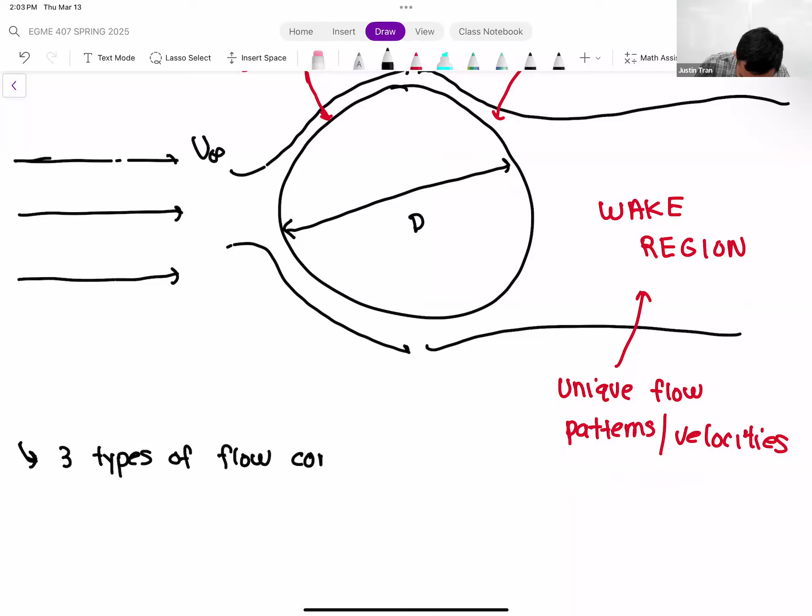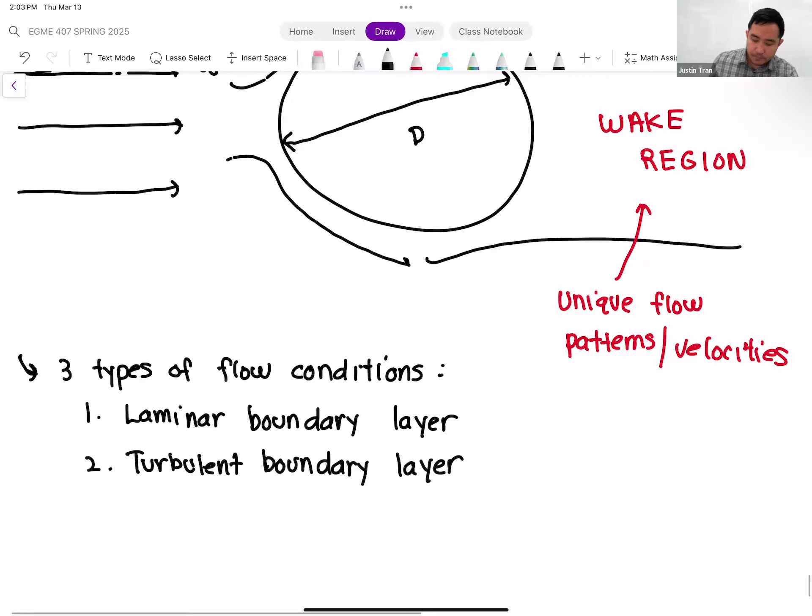The first type is kind of the same as our flat plate: we have laminar boundary layers. Number two, we have a turbulent boundary layer. So those two things are the same as the flat plate. Just because you have a blunt body, you'll still have laminar and turbulent boundary layers. But what's unique about the blunt body is that we also have to consider the wake region, which has unique fluid mechanics.

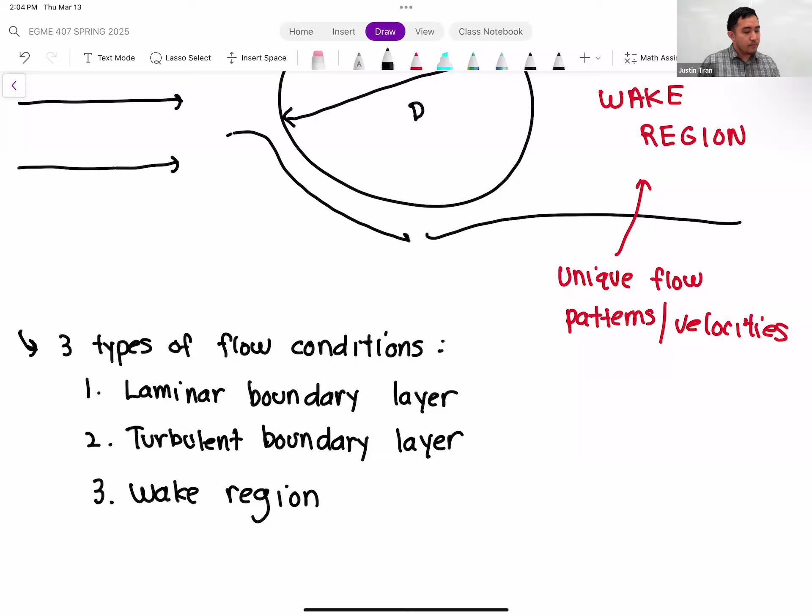I'm not going to get too much into the fluid mechanics of flow over a blunt body, that's more of a topic for 333. But for our purposes, what we're mostly interested in from a thermal perspective is how big each region is going to be for our given geometry.

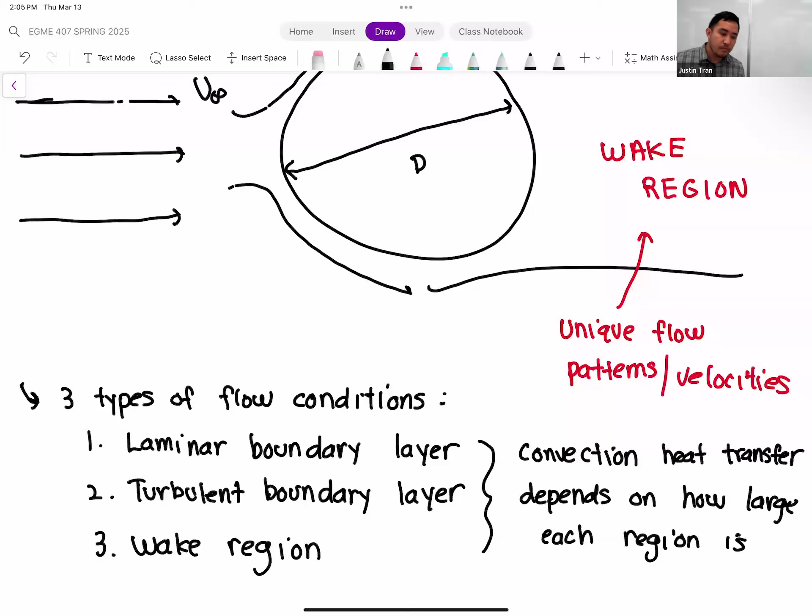What you're going to see is that for flow over a blunt body, we actually go by a little bit different rules. There's not a strict cutoff between laminar and turbulent like there is for the flat plate. There's a lot of different regimes because within the different regimes, you're going to have different sizes of these regions. Any questions on this?

Okay, so let's draw a couple pictures here just to show you what these might look like. Let's look at a case where we have very laminar flow, so very gentle, very slow flow.

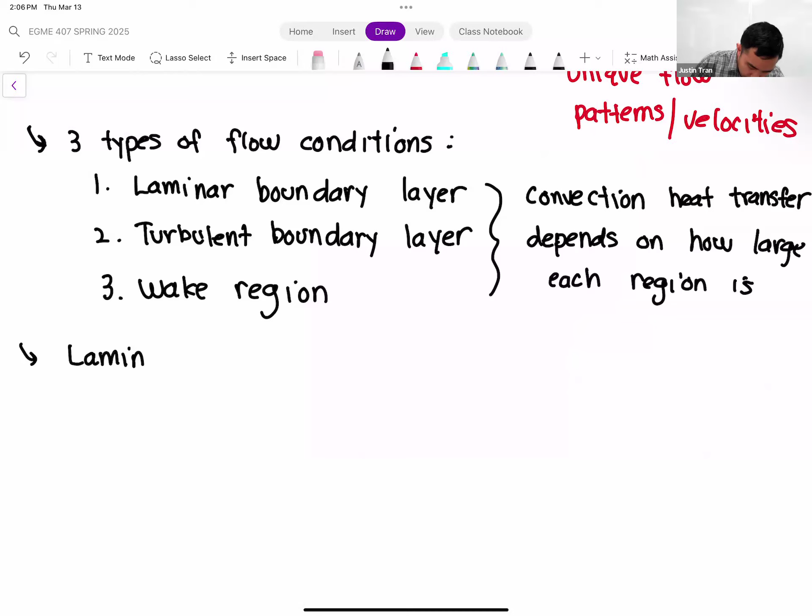Okay, so let me go ahead and draw my cylinder. We have the velocity that's coming at it. Okay, so this is not the most extreme case.

In the extreme case, you can have what's called creeping flow. Creeping flow is flow that's so slow, or maybe the fluid is just so viscous, that no boundary layer separation actually occurs. So it is actually possible to have flow past a blunt object and have the boundary layer stay attached the entire time, but the flow has to be extremely slow for that to happen.

So what's more common, even for our laminar case, might look something like this. When I'm talking about flow past a blunt body, I'm going to talk about the upstream side. The upstream side of the object is the part that's going to be meeting the flow, the part that's going to be hit by the fluid first. Then the downstream region is going to be the part where the flow eventually goes towards.

In most cases, on your upstream side, you're going to have a stagnation point, a point where the flow kind of stagnates right in the middle. Then the boundary layer is actually going to start to wrap around from the stagnation point around the object. For laminar flow here, we have a laminar boundary layer that stays attached to the object on the upstream side.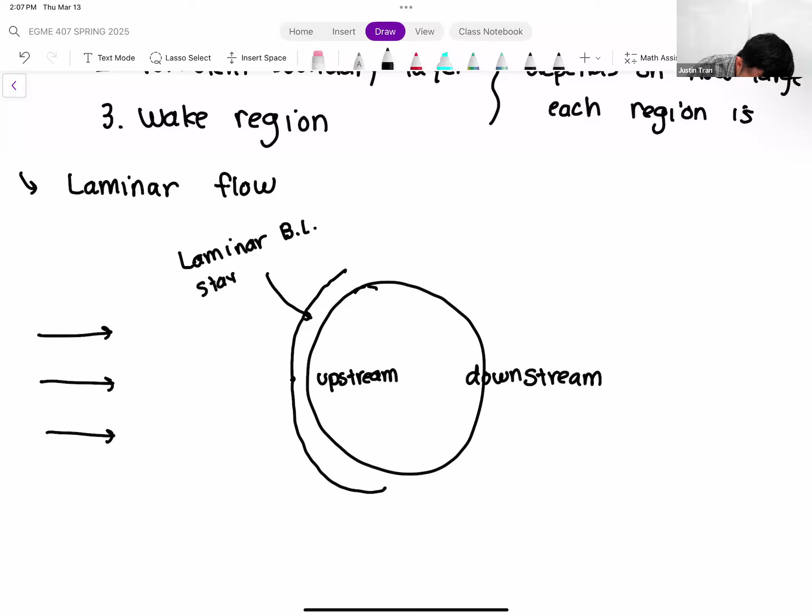But when you have laminar flow, the boundary layer eventually is going to separate from the object itself. And what's interesting is that because the flow is fairly slow, separation actually occurs fairly early, kind of around this region here, when you get to the top of the cylinder. So your flow looks something like this. With laminar flow, you have fairly early separation of the boundary layer.

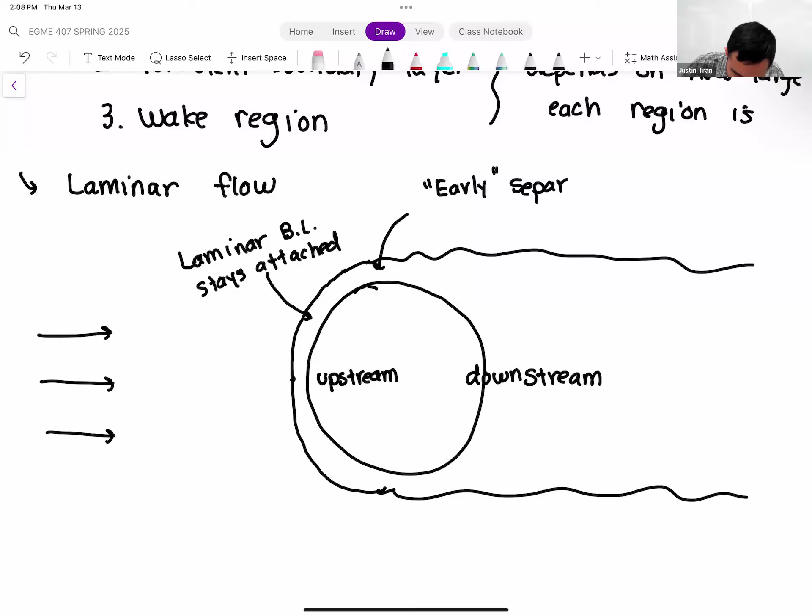So now let's look at a case where our flow has a bit more velocity. Let's say we have more turbulent flow here. Again, these are not two separate cases - these cases exist on a spectrum. Depending on the Reynolds number of the flow, depending on the speed and the size of the object, you may get cases anywhere in between these two.

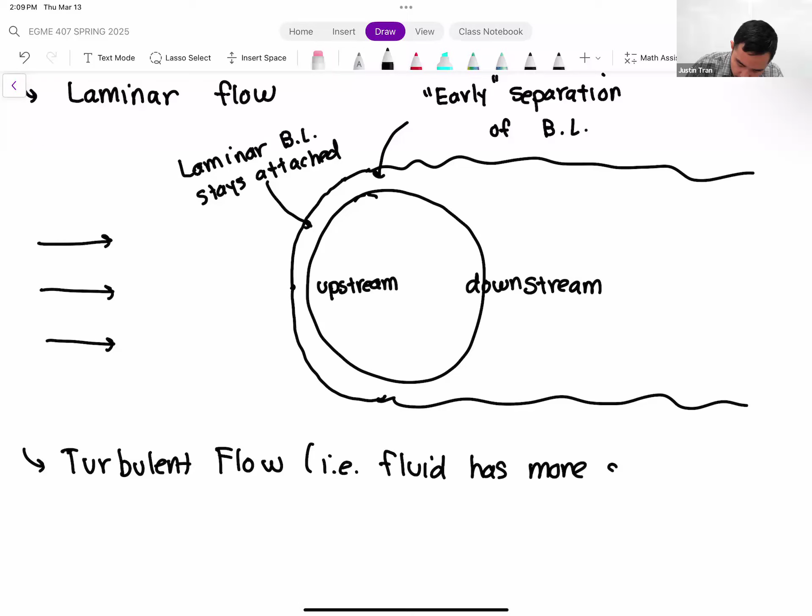So for a case where our fluid has more speed, we have velocity coming in. We have a stagnation point just like before. And just like before, we're going to have a region where we have a laminar boundary layer that's attached to our object.

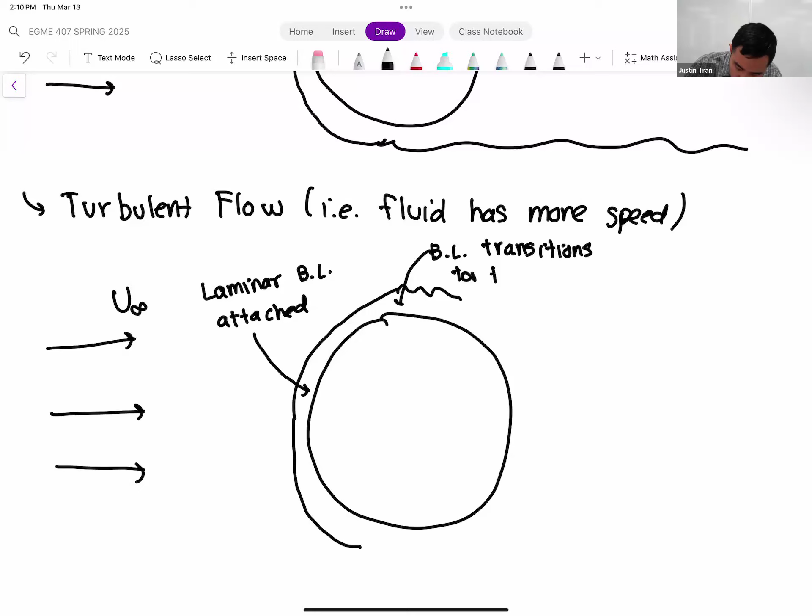But when our flow has more energy, or more speed, that boundary layer is actually going to transition into turbulence somewhere along the length of the object itself. So here the boundary layer transitions to turbulent - you have kind of a rougher boundary layer there. But what's interesting is that when you make the flow more turbulent, the boundary layer actually stays attached for longer, so you have a late separation down here.

So you still get separation with turbulent flow, it's just that it happens much later. And that results in a much smaller wake region compared to the laminar case.

Okay, so we'll pause here for now. We'll talk about on Tuesday how this affects our Nusselt number and how that affects our calculations, and we'll do an example with that.